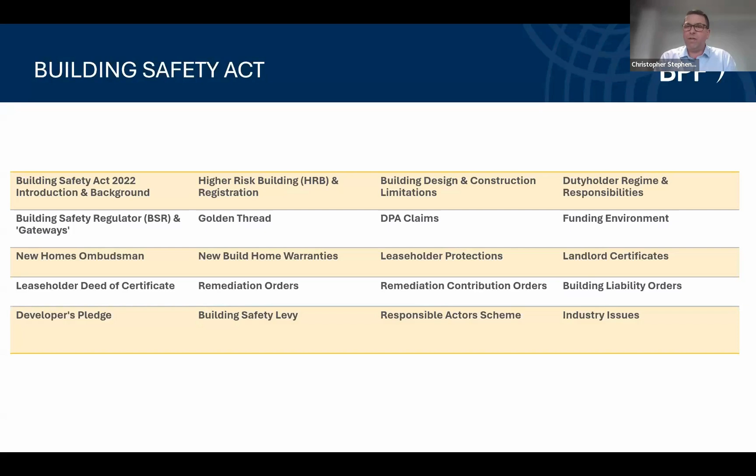Whilst it does all of those important things, there have been some gaps that have been evidenced. You might recall that the Levelling Up and Regeneration Act introduced a change to the way the definition of qualifying leaseholder works, because of the problem that had been evidenced by the surrender and regrant implication of a lease extension, to close the loop and bring that back within the definition. The Leasehold and Freehold Reform Act also does the same.

So the Leasehold and Freehold Reform Act is the second part of a piece of legislative work that the government has been doing, and does important things like banning the sale of leasehold houses, making it cheaper and easier for leaseholders to extend their leases, and increasing the standard length of lease extensions to 990 years. But it was also used as a vehicle to amend the Act.

Implementing regs have been introduced. The provisions of the Act are being phased, so certain provisions are being brought in at different times. For the purposes of the BSA, those were sections 114, 115, 116 and 120 of the Leasehold and Freehold Reform Act. When it was released, the government explanation was that further amendments have been brought in to ensure that the leaseholder protections set out in the BSA are properly secured.

So we're just going to have a look at the 3 key changes that are produced by the Act, which are focused around Part 5, which is the part of the Act that deals with obligations in respect of what we call relevant buildings, so anything over 11 metres. The aim was to ensure that leaseholders continue to be protected from dangerous buildings and from the cost of fixing them.

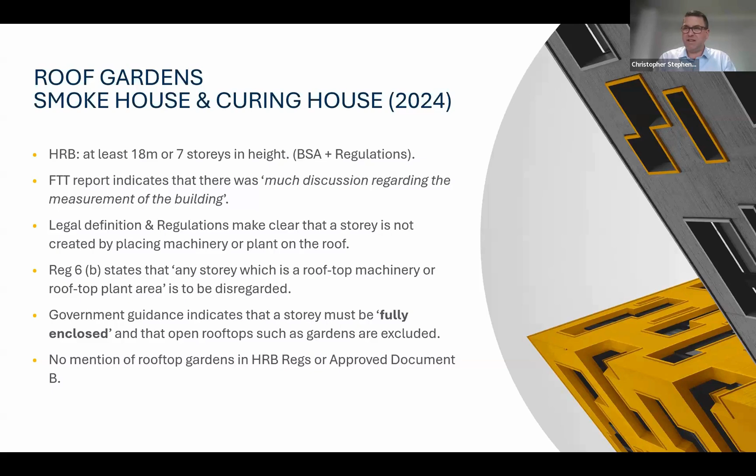The outcome was that there's no clear definition of a story, either in the Act or the regs. And the FTT made the point in the decision that the published online guidance on the landing pages at gov.uk was not a reliable method of interpretation of law.

I think this just brings you back to there's a lot of chat and chatter about this topic, which is vast. The Act is huge, it's got 5 parts, it runs to 300 pages. It's got explanatory guidance notes that run to 465, and 27 pieces of implementing legislation that sit underneath it.

To be able to properly understand it, lawyers like us who have had involvement over the past 7 years need to be asked questions about what this means for clients and their stock. We're still talking about existing stock, so new builds and developments is a different regime.

But it's interesting because the remediation order passed, as I think it would have done anyway, but there was a lot of discussion in the hearing and in the decision about how you do the calculation, what the height of the building is, and how you get there.

The difficulty is if you've got a project already underway or already constructed, you're retrospectively being told that you now have to comply when you might not have considered that you did when you originally put the project into traction. So it's that additional uncertainty, and it requires almost like a unilateral review of what you've got on site for existing projects, which is going to further impact things like viability, presumably.

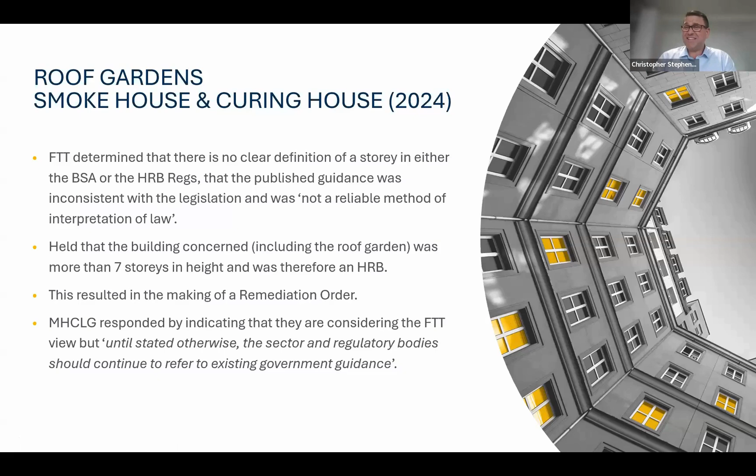Very troubling, particularly because it's kind of an amenity that we see quite common, particularly in London now. Yes, and something that would be desirable and good for the residents. Yeah, and open, post COVID, I suspect there was a big driver for bringing in open spaces, giving people access for mental well-being. It's part of the kind of process.

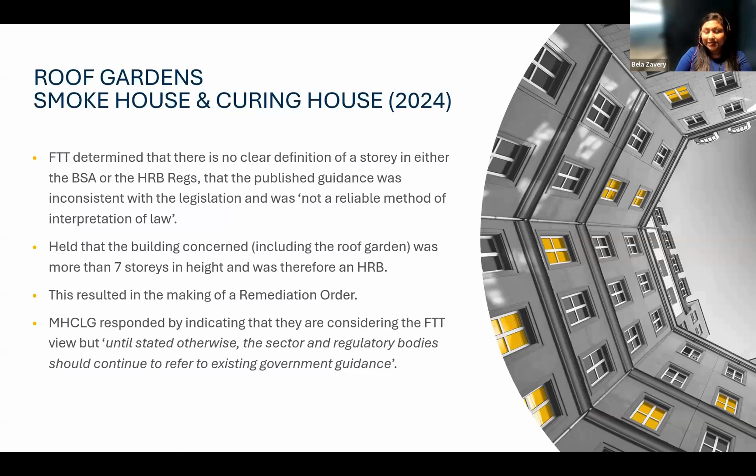That's troubling. I've got 3 cases to talk through. Smokehouse we've done, that's number 1. Number 2 is a case called Lehner v Lant Street, again from 2024.

This is a case that deals with the difference between the leaseholder protections as they are introduced into the back of the Act. Schedule 8 is the part of the Act that introduces the leaseholder protections, and the definition of what the Act terms cladding remediation. So just a few brief facts.

Mr. Lehner was the leasehold owner, or is, I think still is, the leasehold owner of flat 44 in block 1 of 3 blocks at Lant Street that were built in the early 2000s. In 2020, the building's management company got in touch with the residents to say they felt there were some works that needed to be done, involving the removal of external cladding, stripping out insulation, installation of fire safety barriers, and then reinstatement of the original panels. It was a cladding removal and replacement job.

Mr. Lehner decided that he didn't like the idea much of being charged the cost of those works, and the irony of this case is that the per leaseholder cost, or certainly his cost, was very small. This is a case that went to the FTT because it was challenged.

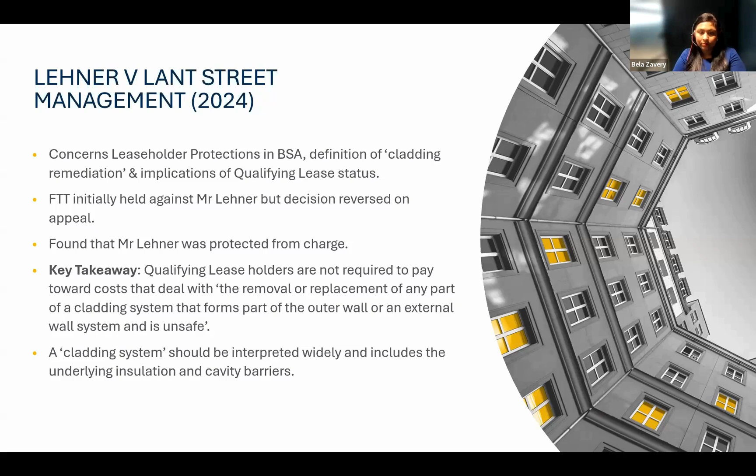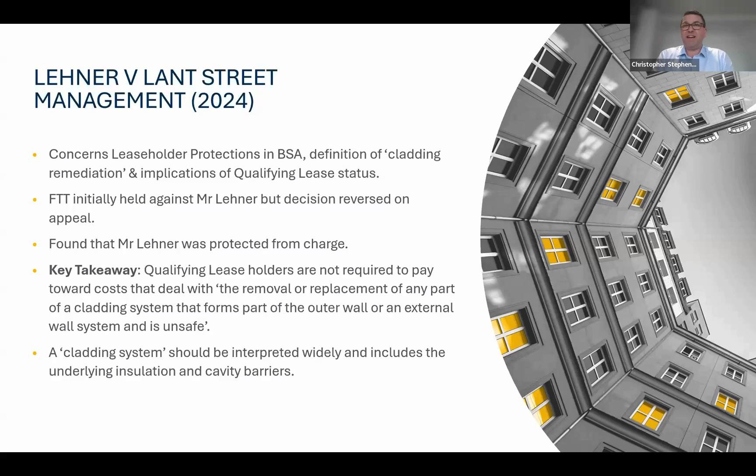The removal, as it's on the slide, the removal or replacement of any part of a cladding system that forms part of the outer wall or an external wall system and is unsafe is what you're looking for. So the point being, cladding system as a term should be interpreted widely and includes a lot of stuff.

And the cost can't be passed on to leaseholders. So effectively, it's a cost that has to be borne by the freeholder, and certain leaseholders are protected. So building owners have to consider carefully works that they are planning for 11-meter plus buildings and think about whether or not they will be able to recover the costs.

I mean, a question, and David, please chime in. I suppose arguably there might be some protections already available if it was a new build that was built not too long ago, say 5-10 years ago, or 5-7 years ago. Is this something that they could potentially look to try to pass on to anybody they've bought from under any collateral warranties or construction provisions, or something they should have hopefully thought about when they purchased? Are you seeing a lot of that?

They're trying to recover it from previous owners, or I think we've got to recognise the fact that we've got the Responsible Actors Scheme. And obviously, therefore, in respect of the new builds, we've got the developer pledge as well, haven't we? Exactly, the developer pledges have got to take into consideration there.

Are you actually seeing many claims under that though, David? Are we actually seeing that actually translate to people? A lot. But what we're also seeing is a difficulty in the fact that you will then start to get two chartered fire engineers who have perhaps been paid by two different parties who have come up with different answers. And then you're going to look at what does a defect actually mean.

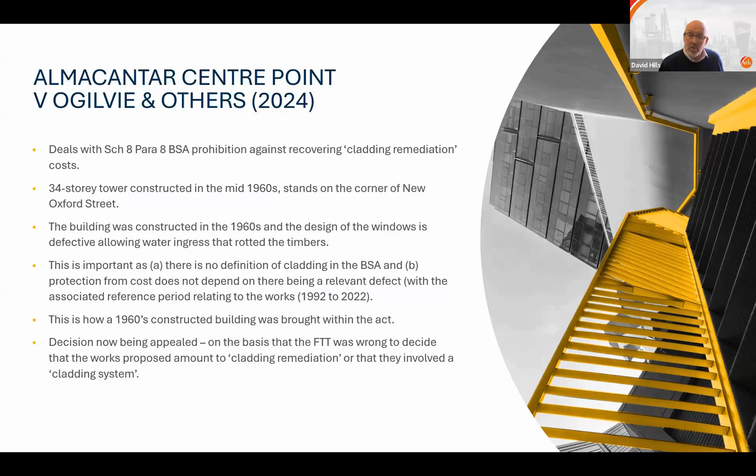Even if some things are required, you've got to consider and take advice on that at an early stage, because there could be a cost implication you can't recover under what we'd call a service charge. There's certain guidance out there, for example PAS 9980, that allows you to look at buildings, and even that document suggests buildings pre-1970 of masonry construction are unlikely to have inappropriate cladding systems. But if work has been undertaken, if any building has been overclad, we need to understand that at a pretty early stage.

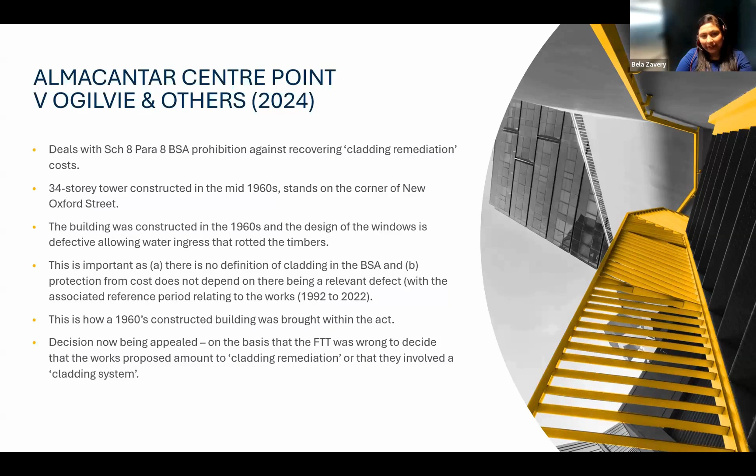Understood, thank you. Chris, back to you. Well, I think that was me done with case law, so I think we've got the next one - maybe have a bit of a chat about the outlook for the sector. What's coming up? So we've got a brief slide here on what happened in '24, a retrospective.

We've got a number of remediation orders that have been made, and a number of remediation contribution orders, setting the principles that these new tools are being picked up and used. When the Act was first introduced, bearing in mind an interested person within the Act can be a public body, I felt they were new and novel and complicated enough that it was probably only public bodies that would pick them up.

But there have been a few privately initiated orders within the mix as well, so expect to see more of that. If we've already got this number so far, I'm guessing it's only going to increase from here on in. From my experience, I don't know about David's, but the appetite of local authorities to use these tools is quite low.

So they tend to use improvement notices as the route through to enforcement, because it's tried and tested and they know how it works and they've done it before. And the costs involved with these can be quite high.

Yeah, and then just to skip over a few here, just conscious of time. But the first building liability order has been made. It's got a complicated case name, but a BLO is a new creation of the Act that allows you to pierce the corporate veil and attack parties that are linked with a developer. So perhaps if an SPV has been used, a project-specific SPV that's been dissolved or closed down and was responsible for poor building practices, it is now possible to loop around to the parent company that was at that time connected with the SPV to try to make a recovery.

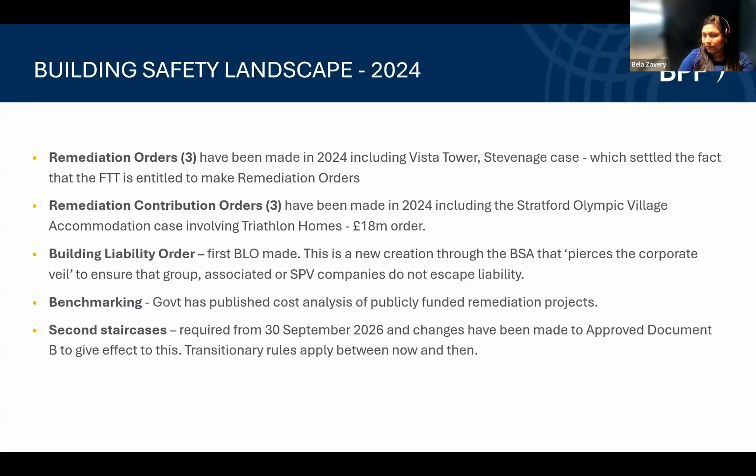So it also impacts things like propco-opco type arrangements, where you've got an operating company and a prop co, risk registers and all the rest of it. It is not the case that if development was undertaken in the 90s and that company no longer exists, that connected parties are free from potential liability.

So that's just something to bear in mind, and the point has now been proven. The government's been very good at releasing benchmarked costs. Those figures have been taken from the publicly funded support schemes, evidence of industry rates for works. That is ultimately helpful for building owners and asset owners, because it should help to stabilize the remedial cost base and allow people to hold contractors better to account. Obviously you've got to find them, and there is a shortfall of labour and construction support in this area generally anyway, but having a published set of data is still helpful.

And then second staircases, the requirement for a second staircase has been set now for 30 September 2026. Many of our clients are designing them in as a matter of course, because they feel it will add to marketability and drive sales. There's been a scheme called Blenheim Square in London, where a developer called Hadley Clario have been criticised in the press about not designing in a second staircase and reducing the height of the building to avoid the requirement. So that's just an example of adverse PR and optical problems created by that.

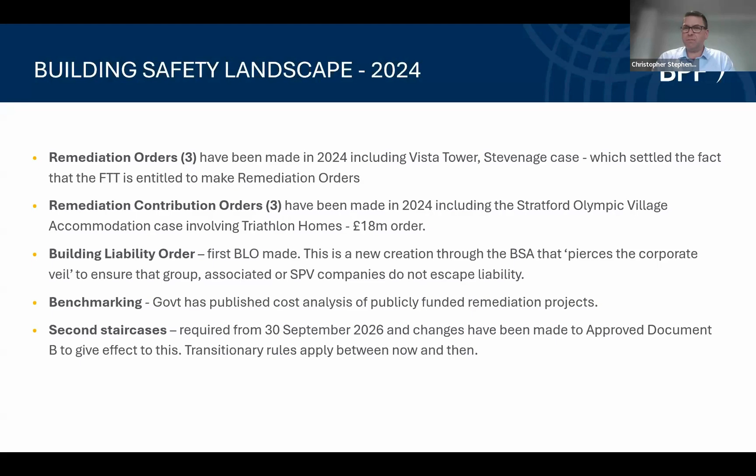And then just looking forwards, a few brief points. A remediation acceleration plan was announced in December 2024. That captures the way that developers are undertaking remedial work. We touched earlier on the developer pledge, which has had 50 some developers sign up to its terms, and 29, I think from memory, have signed up to the acceleration plan, which is a good thing. I think at the last statistics I saw they, as a group, have completed around 25% of the buildings for which they have accepted responsibility. So clearly there's still some work to do.

The government has sought to collaborate with industry and with building owners to try to move timescales forward. And there is a basic deadline set for the end of July 2029 from memory, in which the government would like to see all HRBs finished and all sub 18-metre buildings at least started and underway. And from 2019, when the private sector ACM fund was released, which was the direct response to the Grenfell tragedy, 2029 would then be a decade - it would be 10 years from the commencement of the government support exercise.

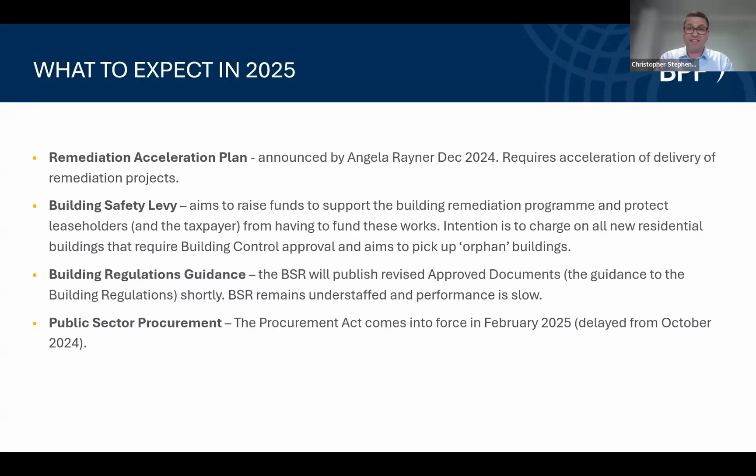That's true. And from my perspective, you have a baseline position that you could use to neutralize any suggestion that more extensive works are required. Which ultimately has huge value. That's very good advice, I think that seems like a good point.

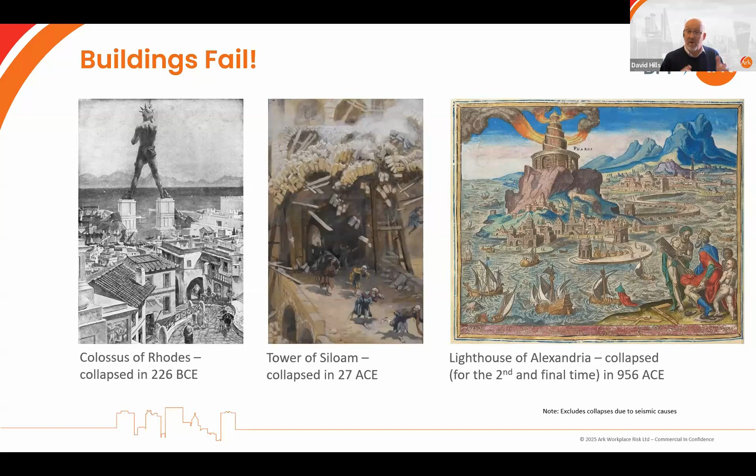We can go back to the Colossus of Rhodes, Tower of Siloam, and the lighthouse at Alexandria. But let's start focusing very much now on residential structural failures.

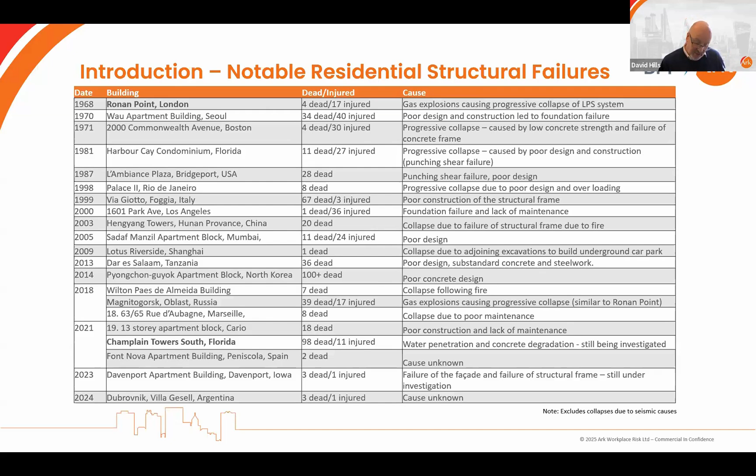What I've done here is highlighted a number of residential blocks that have failed, not due to seismic issues, earthquakes, or other natural disasters such as tsunamis. These are failures due to elements or actions that have occurred within the building, or the actual building's design. I've only gone back to 1968, which is the Ronan Point incident. Taking those alone, we're talking of 500 dead in residential buildings due to significant structural failings. So it's an issue we really need to take account of.

Because when you look at where these incidents have actually occurred, we're not talking about pure third world problems. We are talking about first world problems here. We're talking about countries that have got very good building code bases, yet we are still seeing some significant failures.

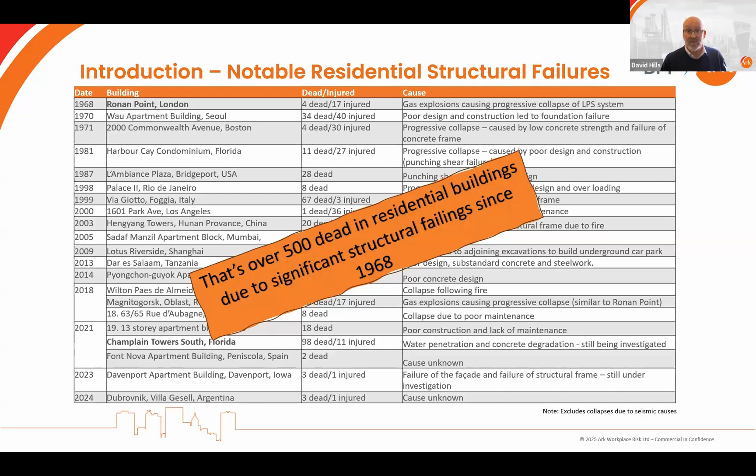So I want to first start off with Ronan Point. Ronan Point back in 1968 was effectively constructed using what's called a large panel system. A large panel system is effectively huge lumps of large concrete panels, but this particular one was designed with what's called pinned connections, and I'm not going to go into too much detail about that.

Effectively, we had a gas explosion on the 18th floor. That gas explosion blew out a load-bearing wall. That load-bearing wall was bearing the load of the floor above. That floor fell down onto the next floor, which couldn't take the load, and that failed too. Effectively, we had what's called progressive collapse.

The defects found included poorly designed joints, for example, that weren't designed to deal with what we call lateral loads, such as a gas explosion from inside the building. In fact, when they looked at it, the joints weren't even designed to be able to effectively deal with the wind loadings that were expected.

We had insufficient connections. All of the forces were focused on a very simple steel connection when actually it should have been spread across the load. And then we had poor quality control. Even the concrete that they had within that was found to have included newspaper and rubbish that had come off the site.

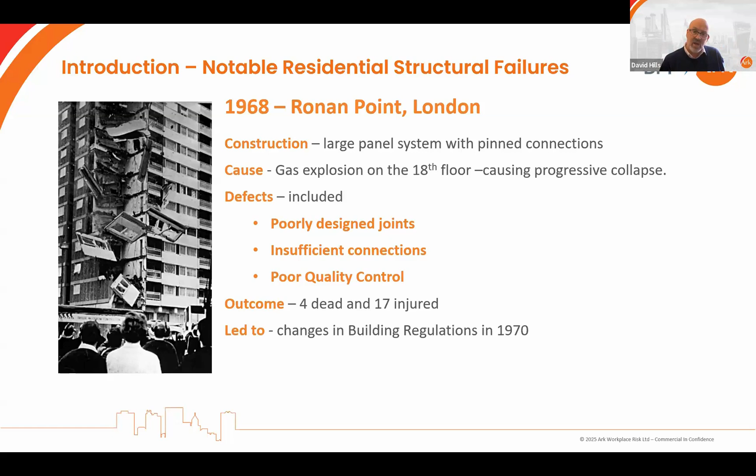Well, I'm going to take you through a video and a simulation of what's called the Champlain Towers South building collapse that occurred back in 2021. This initial section of the video is CCTV footage of the actual building collapsing. I should point out that 98 people died within this building. So if you don't want to see that, there's no bodies or anything else like that.

It's just simple CCTV footage followed by what's called the simulation of why it happened. And the reason why it happened is because it wasn't down to one thing. I'm going to run the video, and what you'll see is that this particular building takes 12 seconds to collapse. The little insert there is the actual simulation of the collapse, and we're going to then see how or why that particular building collapsed in the first place.

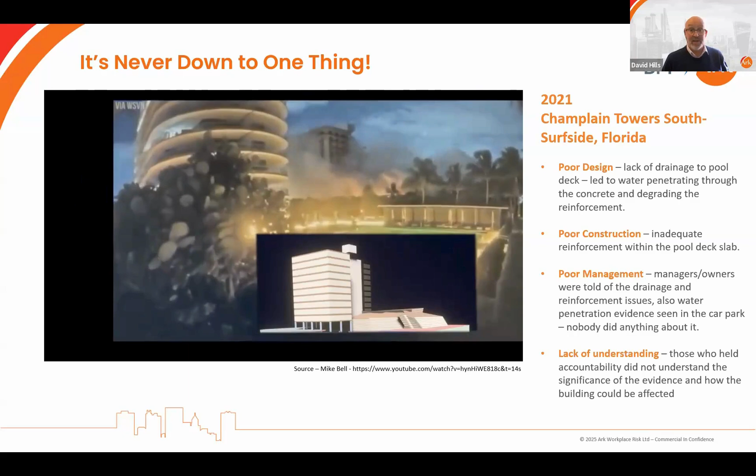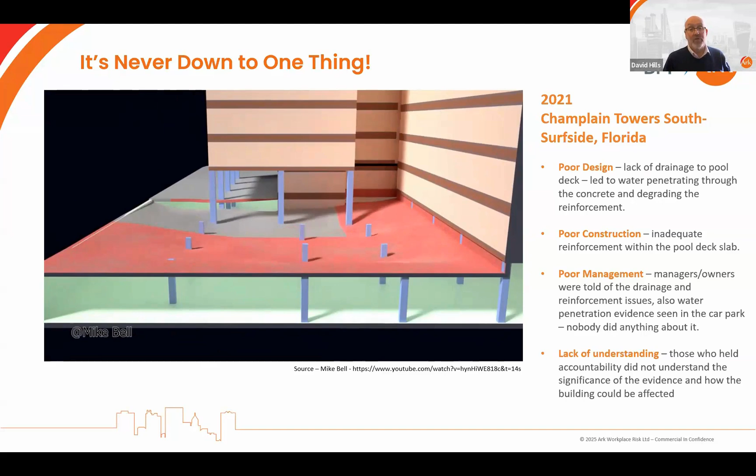This building had a pool deck with parking underneath it, and we had very poor drainage. That poor drainage led to water penetrating the actual concrete. We had poor reinforcement, very poor construction, which led to what's called a punch-through failure of some columns. That happened over a very short period of time, over one evening, which put significant pressure on the main construction of the building, and we had what's called a catenary action, which pulled the other parts out.

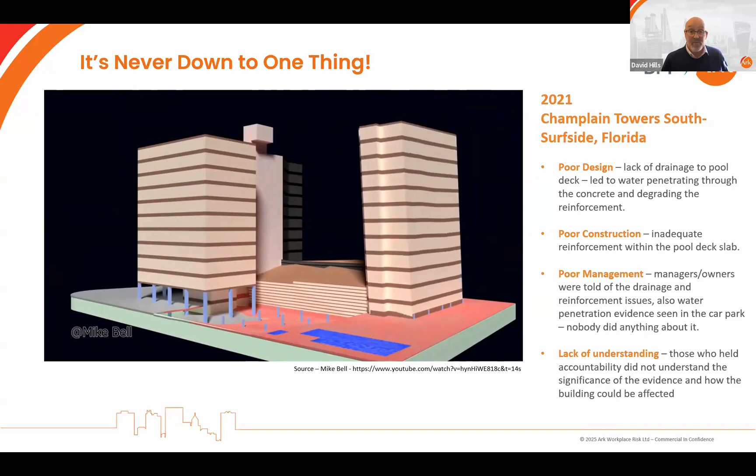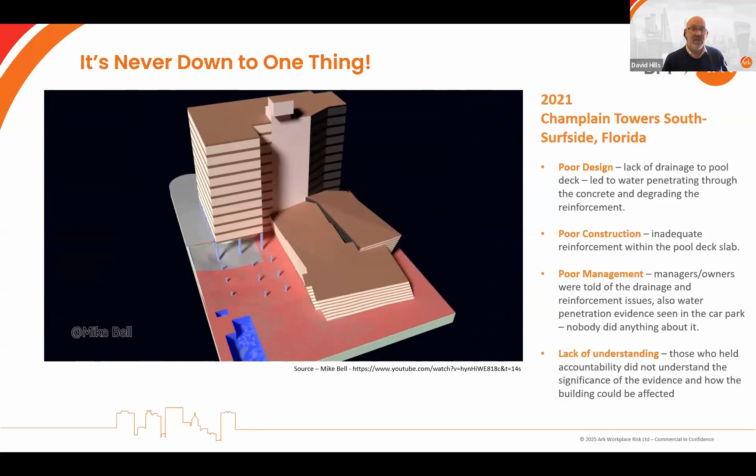Effectively, though, the major issue here is that the management team and owners were told of the drainage problems. They could see the drainage problems. They were told by a survey that they had reinforcement problems. But nobody did anything about it. One of the reasons why they didn't do anything about it is because a lot of people had a very technical, detailed report, but nobody understood it. Nobody knew who was accountable, and the significance of the evidence just wasn't understood.

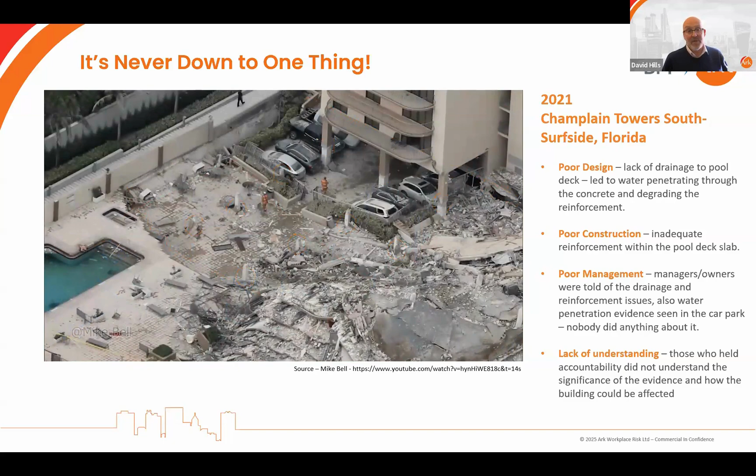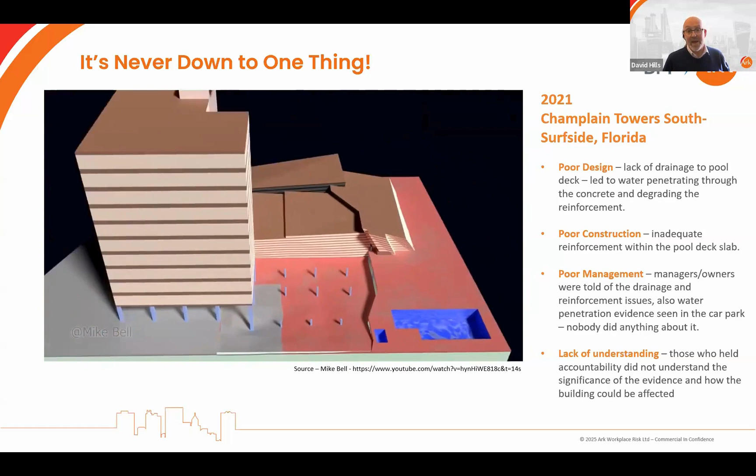So what we saw there was a significant collapse in 2021. We're not talking about 30, 40 years ago, we're talking less than 5 years ago. The federal government are still investigating this and will decide how they are going to take action. But you can see a significant failure in an area which many have told me has a much more onerous and robust building control and building code basis. So that's the quick history lesson.

We understand, therefore, that buildings do fail. And the government have decided to set up what's called a structural safety working group, a series of experts that report directly to the government. In their last report to the government, they actually raised four major concerns.

I'm going to go back to Ronan Point to start off with and talk about the fact that aging large panel systems are still out there, particularly those built in the post-war era. They were designed as a rapid response to housing shortages at the time. And what we saw at Ronan Point could, according to the SSWG, actually occur again.

In a recent Freedom of Information request to the Building Safety Regulator, it's been identified that they know of at least another 200 buildings that are HRBs that have large panel systems, that have gas within them, but haven't had sufficient strengthening works. The failure to properly assess and reinforce these structures could result in catastrophic consequences, both in terms of human safety and financial liability.

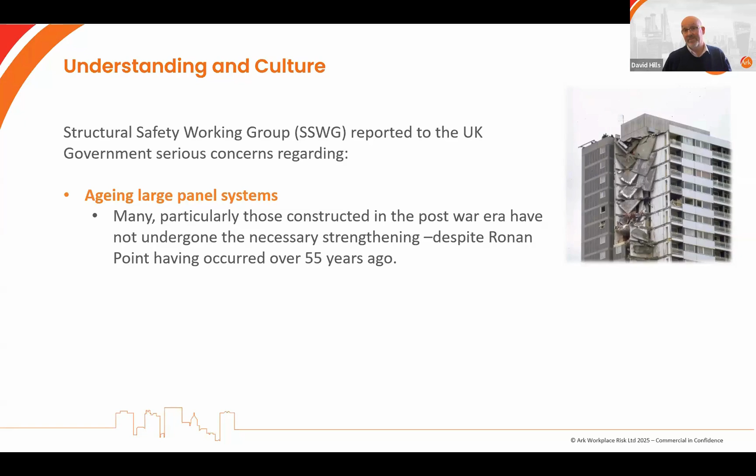Last year, I would imagine most people saw in the news information related to what's called reinforced autoclaved aerated concrete, RAAC, or as one of my structural engineers called it, a bar of aero. Effectively, what we've found is that it's a lightweight concrete alternative that was used from the 1950s right the way through to the 1990s. Investigations are actually proving that it's just no longer suitable and sufficient. RAAC panels deteriorate unexpectedly, and it can lead to potentially very, very quick structural failure.

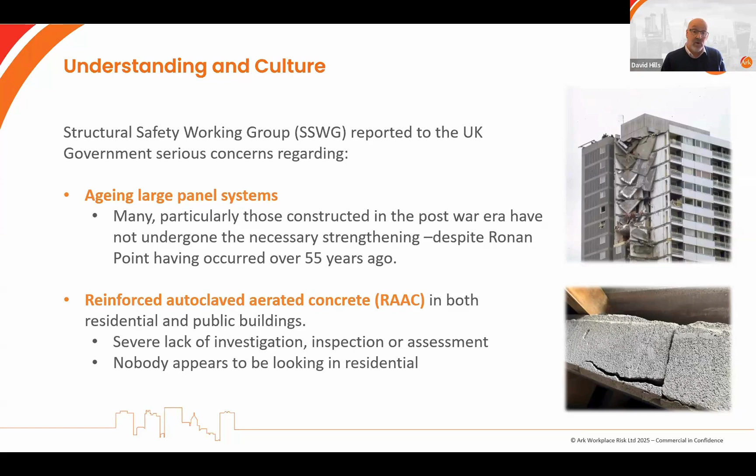I totally agree, that's exactly what people need to be looking at. We need to actually understand what we have, and the Structural Safety Working Group are concerned that we just don't have that understanding. They talked about two other particular growing trends and problems.

Now, the growing trend of adding additional floors to existing buildings, we also refer to as airspace developments. When you add floors to an existing building, it offers some significant commercial potential. We all know that, but the working group is extremely concerned that there just has not been significant understanding or consideration of whether the existing building can actually take that particular loading. There is also an element, I know this from personal experience, of a lack of accountability. Who do you speak to if something goes wrong?

And if you're a leaseholder or a tenant living in one of these buildings, there is not enough protection in place to make sure that all of this can happen. Who do you speak to? The local authority can't take action because it frequently falls within permitted development rights, so they don't have the ability to do anything unless it breaches a construction management plan. It's very limited recourse.

Although, if we are doing that to a building that is 6 stories and we're adding a 7th story, therefore bringing it within the auspices of the Act, remember that definition can change. It is probably likely that it's going to change over the next couple of years, from what the regulator's talking about, that undertaking that type of work is going to come under scrutiny from the regulator, and the regulator is going to expect to see comprehensive structural assessments of the existing building.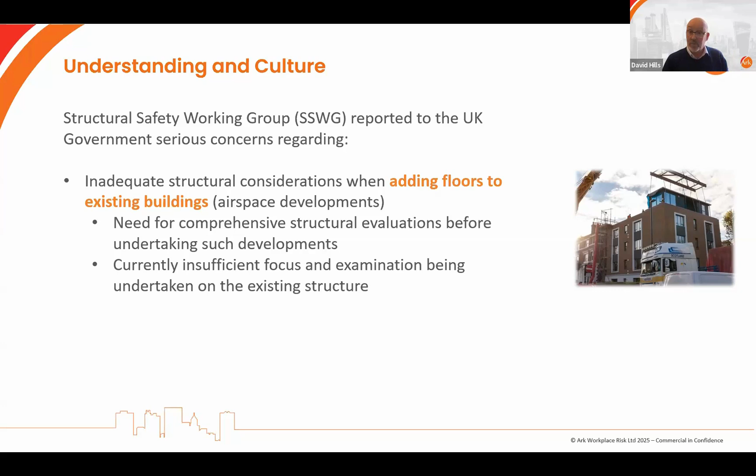I just want to continue through the cladding issues as well. We mentioned earlier the brick slip side of it. The issue of cladding failure, particularly with brick slip and other types of panel systems, is not new, but it remains a persistent problem. We are often seeing panels detaching, not whole panels but part of panels detaching from buildings and leading to some serious accidents, posing a continuous threat to public safety. It comes down to lots of different reasons: poor construction technique and poor certification problems, which we can see across the whole industry. We've got a major issue in respect of construction products and their approval.

Most people will turn around and say the issue relating to cladding is fire related because of what happened at Grenfell - that's heightened awareness of cladding materials. Almost all the focus many people have had is on fire safety issues, understandably. But the need for structural and stringent reviews of cladding materials does also remain urgent. The financial impact of rectifying unsafe cladding can be devastating, as many property owners have already experienced firsthand. One question I would have later for Christopher is that the Act really focused on remediation of external walls relating to fire safety, but we also ought to be thinking about the remediation of external walls in respect to structural safety as well.

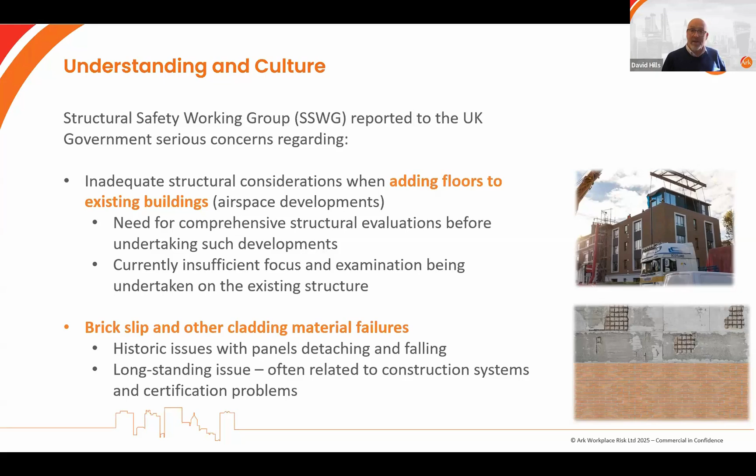Just finishing off what the SSWG have said, they are extremely concerned, and some of the language they used in the report we really need to take heed of. They believe, with the evidence they've seen, that the construction industry has a tendency to still continue to prioritize profit over safety - that was terminology they used directly to the government. They also suggested there was a need for the industry to have a cultural shift towards actually valuing safety. Far too many organizations, they suggested, just did not want to actually understand the building because many of these issues were hidden, and if they're hidden, they're out of sight, out of mind. They made it very clear that too many owners and managers are ignoring structural concerns, probably down to a lack of understanding.

I think it also depends on the way a lot of these buildings work. So if you're a build-to-rent operator, the expectation is that you're going to maintain, and there's an element of stewardship which sits with the building. So taking on a building and renting it out, you have to be vigilant, because otherwise you can't rent the property out on a long-term basis.

If you own the freehold of a building that's really largely retained for the purpose of ground rents, and you wanted to add an extra floor of apartments, the real belief behind it is that you'll extract all the value out of the building when you grant up all your long leaseholds. So all you're really left with is ground rents.

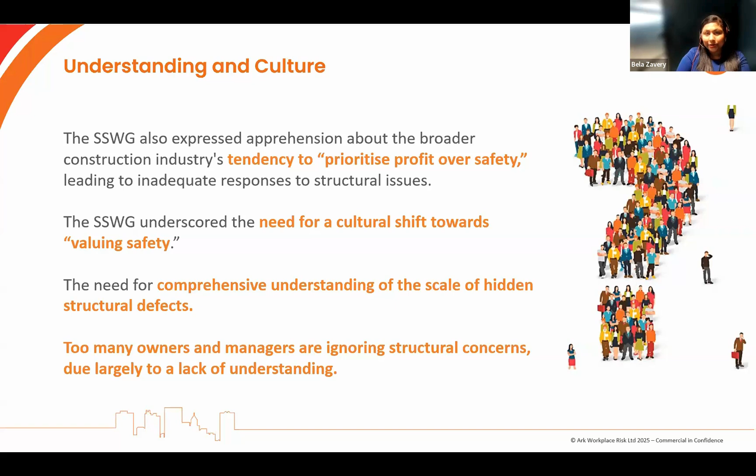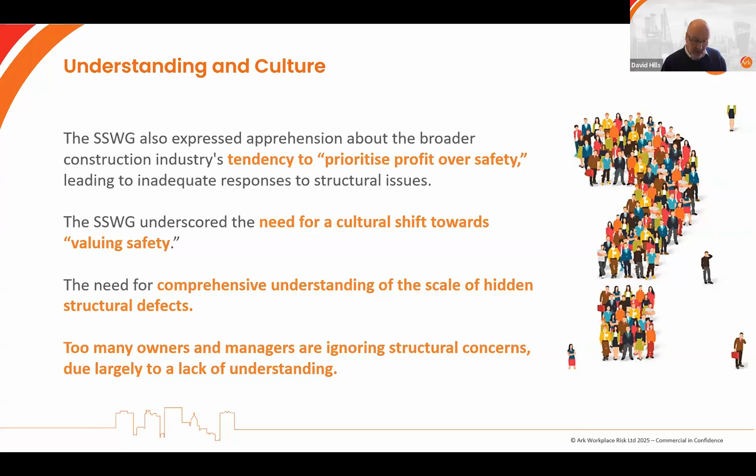Okay, so I'm going to whiz through the next couple of slides because they're really just about where we're sitting now in respect of higher risk buildings. So we all know what a HRB is. Currently it's a building with 2 or more dwellings, 2 or more residential premises, or student accommodation that is 18 meters or 7 stories.

But we have to recognize that scope is going to change. It's a very fluid situation, and the Secretary of State could effectively change both scope and extent at any time. Obviously they'll have to go through statutory instruments, but the Grenfell Tower inquiry has made it very clear we need to move away from this arbitrary 18 meters or 7 stories. It's an arbitrary figure, and the minister at the time, when asked why that was the particular figure, said, well, we had to come up with something. So 18 meters and 7 stories is where we are.

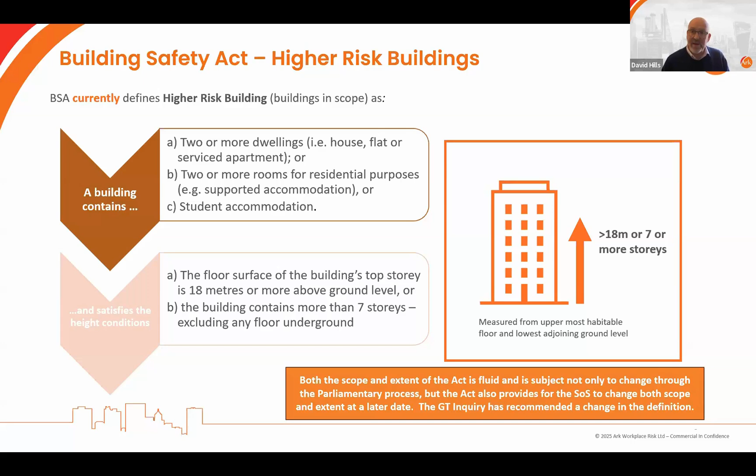Okay, so what does the Act actually require us to do? Well, it basically says we've got to assess building safety risks for the parts for which you are responsible. Now, when we consider what a building safety risk is, it's defined very clearly as a risk to the safety of people in or about buildings, relating specifically to the spread of fire, to structural failure, and any other prescribed matter.

So we get a lot of questions asked - well, is it a legal requirement that I do a structural risk assessment? From what we can see, yes, structural risk assessments are a requirement of the Building Safety Act when you look at Section 83 and Section 62. Section 62 makes it clear structural failure has to be assessed - it's a building safety risk.

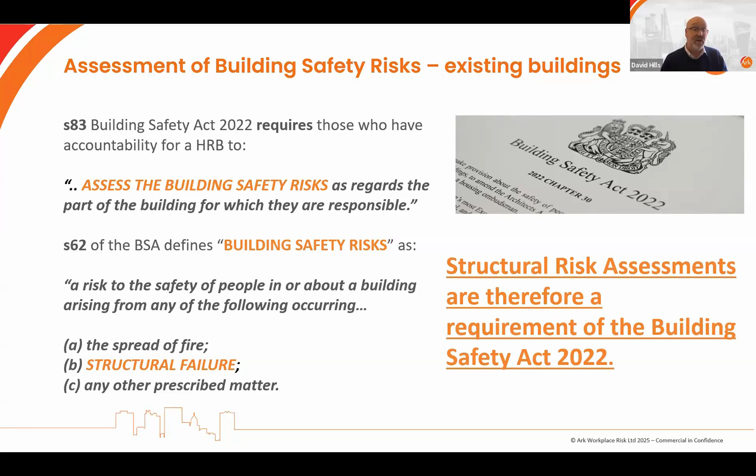What the Act has also said is that if you've undertaken an assessment, those who are accountable for that higher risk building - and we're talking buildings over 18 meters, 7 stories - should be undertaking further assessments at regular intervals. They should be looking at those assessments when or if they suspect the current assessment is no longer valid. For example, if we're undertaking an airspace development, I would suggest that assessment is no longer valid. But also the regulator themselves may direct you to undertake a structural risk assessment within a specified period of time. So that's what the law says.

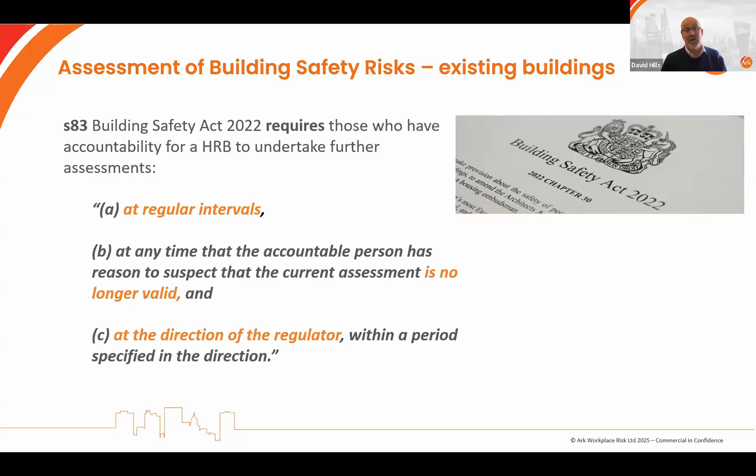Now, what we've also seen is some significant guidance being issued by the regulator and others. The regulator, in December last year, issued their guidance on how you should apply for a building assessment certificate and the criteria they will be reviewing. They made it very clear - criteria S19 makes it clear - a safety case report should include evidence to confirm that a suitable and sufficient assessment of the risk of structural failure for the building has been undertaken.

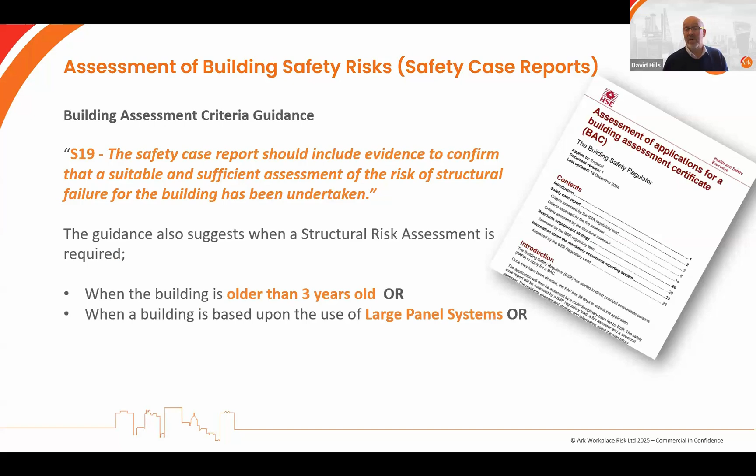The guidance then gives us a bit more information and suggests that a structural risk assessment should be undertaken if the building is over 3 years old, or if the building was built using a large panel system - and buildings are still using large panel systems - or where the full design and construction details are just not available. And earlier, Bella, you mentioned the fact that some information is often difficult to get.

I can assure you, it is incredibly difficult to get hold of. A lot of people just don't have access to that information. But the guidance also suggests this applies where there is a lack of understanding of the structural design, and finally, if there is a known history of structural problems.

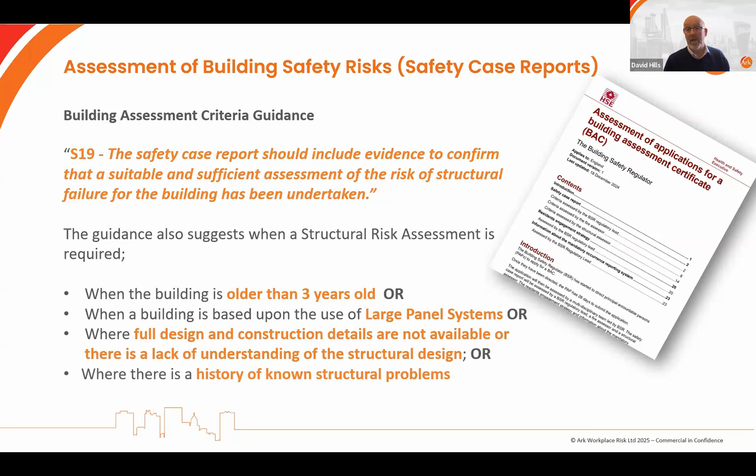So again, we've got the law that tells us we need to be undertaking these assessments. We've got guidance that tells us very clearly what the regulator is going to be expecting to review. And then just a couple of weeks ago, at a Construction Industry Council webinar, the building safety regulator themselves provided some insight about what we call emerging themes.

Now, they've had over 1,400 applications for building assessment certificates for existing buildings so far. That's a lot, and they haven't produced a large number of certificates so far. They are extremely concerned about the amount of additional information they are having to ask for. Basically, the regulator has said they clearly recognize that applicants are more familiar with fire, less familiar with structural issues, and therefore we need to be able to address that.

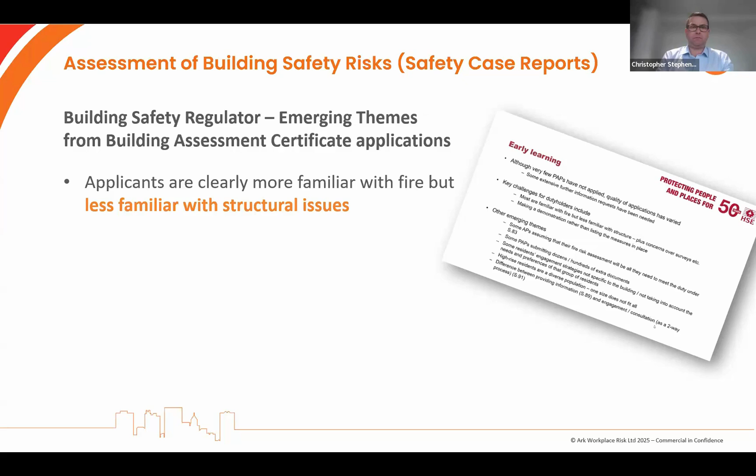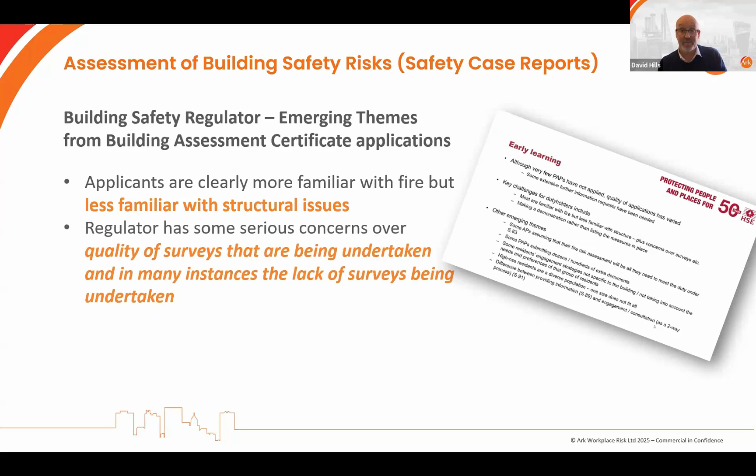We need to start thinking about when we're submitting our application that we've considered structure to the right degree. They are also extremely concerned about the quality of surveys when people have actually undertaken them, and there is a lack of any understanding of structural risk or even structural condition. The regulator also pointed out that many accountable persons assume that their fire risk assessment is all that they need to do to meet their obligations.

But they've made it very clear that's not the case. So is it good practice that they should be looking at doing a structural survey before they commence works, but then revisiting that after the work's completed to make sure that's still the case, and then on a regular basis as well? Totally, that's what we should be looking at. Structural risk assessments should now be in the same psyche that we have in respect to fire risk assessments.

You may not be undertaking them every year, there may be a greater frequency, but we've got to start thinking that structural risk assessments or condition surveys are a necessity. Easy for me to say.

But that's also part of the due diligence process when you're acting on acquisitions, Chris. I think it's potentially something else that we as lawyers should be asking for, and as investors, if you're looking at buying a building, that's something you've got to see—not only that one survey has been done, but that it's been done consistently, almost as something they've taken on board as part of their building maintenance, considered at frequent intervals.

Or you might want to consider commissioning your own survey to complete the process and make sure there's an up-to-date version. Because you often see a lot of these building surveys being undertaken before works are done, but actually once you're on site, things are happening constantly, so it probably needs updating after the works are completed.

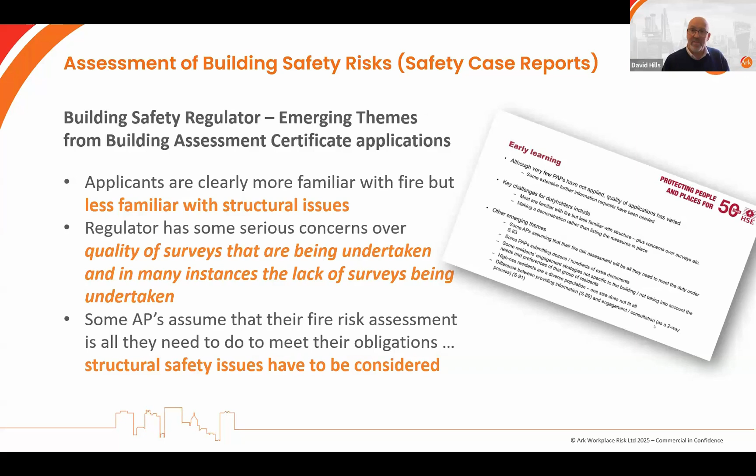In her speech, she actually suggested that we should be starting to name and shame those who continue to try and game the system.

She was extremely critical of the applications being submitted to the regulator and suggested that was a significant cause of some of the delays. She highlighted one particular case, quite a shocking one, where someone submitting their justification to the regulator wrote a one-page document with these words on it: "I don't know why I have to do this. It complies."

So even with the warnings, even with the guidance, even with the clear requirements set out within the Act and the regulations, we're still seeing issues with both development and existing stock. My question to the industry is, why are we not getting this? Why are we not getting this, especially when the benefits can be great?

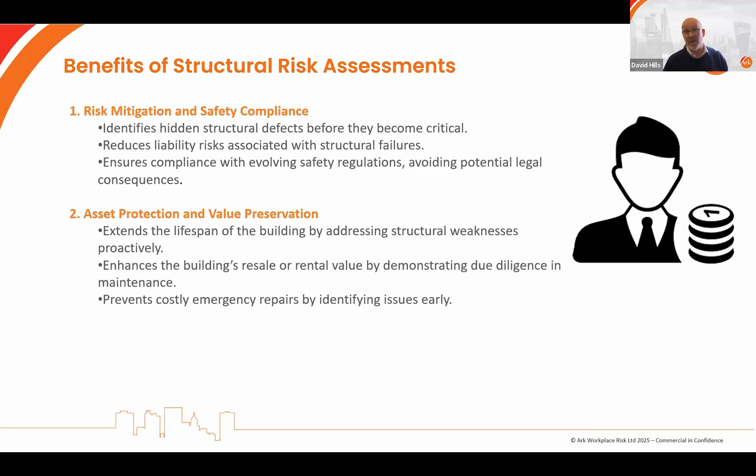It can also support prevention of costly emergency repairs by identifying potential risks or issues early. In addition, it can reduce long-term repair and insurance costs by mitigating risks in advance. Structural risk assessments can play a really vital role in long-term property management and maintenance planning, making sure we focus on what's important and effective rather than what is not. So it can prevent sudden financial losses due to unexpected structural failures.

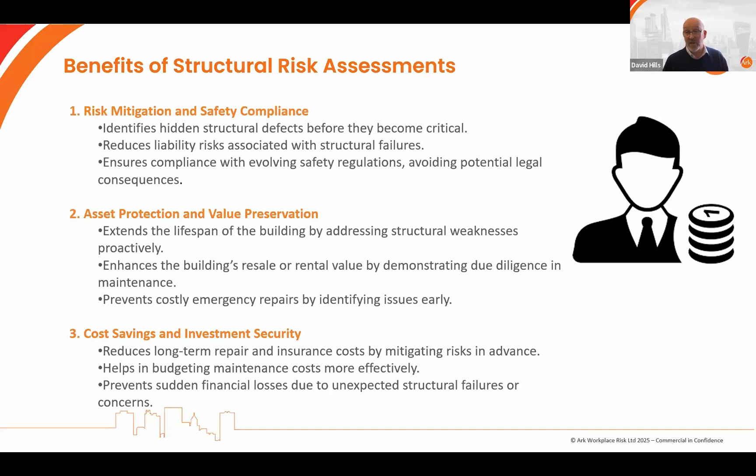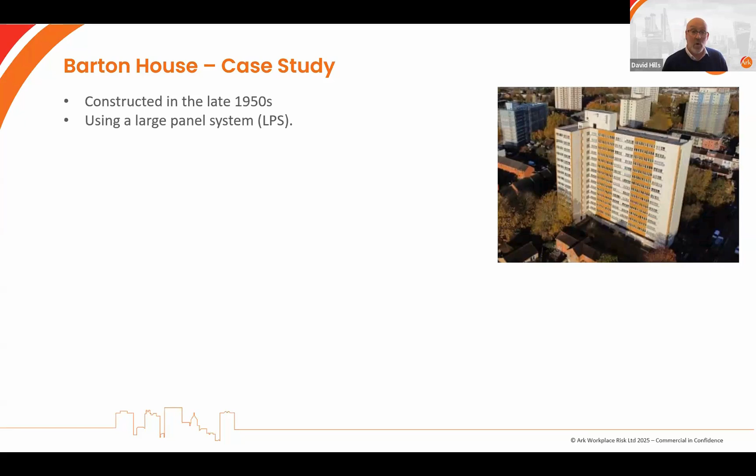With that in mind, I really want to consider what happened at Barton House. Barton House is a 65-year-old, 15-story tower block based in Bristol. It was built in the late 1950s using reinforced concrete walls, basically a large panel system.

In November 2023, an engineer's report, undertaken as part of the owner's safety case process—so they were going through the right process—concluded there was significant risk due to disproportionate collapse. There was a lack of structural ties between the floors, and in addition, the quality of the concrete was inadequate. Basically, they had to undertake works within the building.

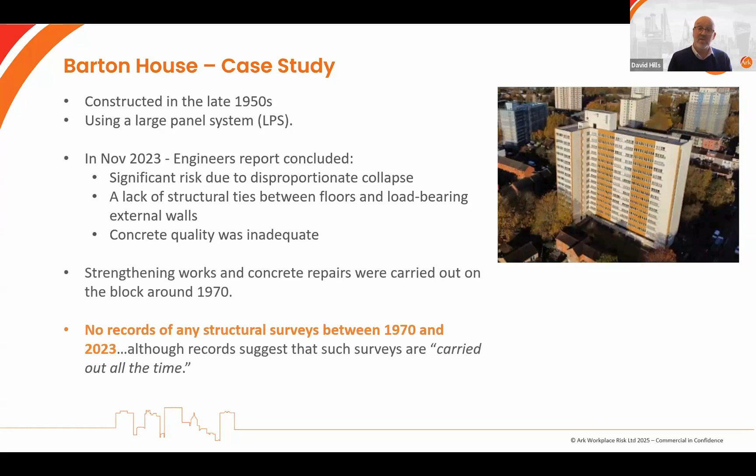Going back through the history of it, there were strengthening works and concrete repairs carried out on the block around 1970. But there were no records of any structural survey between 1970 and 2023, although there were some notes saying, yeah, we undertake these all the time.

So the costs associated with that: we had 250 residents that had to be rehoused in local hotels, at the cost of the owners, between November '23 to February '24. The cost of the works within the building was estimated to be in the millions. And we've got residents themselves, many of whom have said, we just don't want to be here anymore, but we can't sell. They also don't trust the owner, and they don't trust the building itself.

Yeah, so the costs can be significant. Who would want to now live in Barton House, knowing that it's been in the press, knowing that we've had structural issues within that particular building?

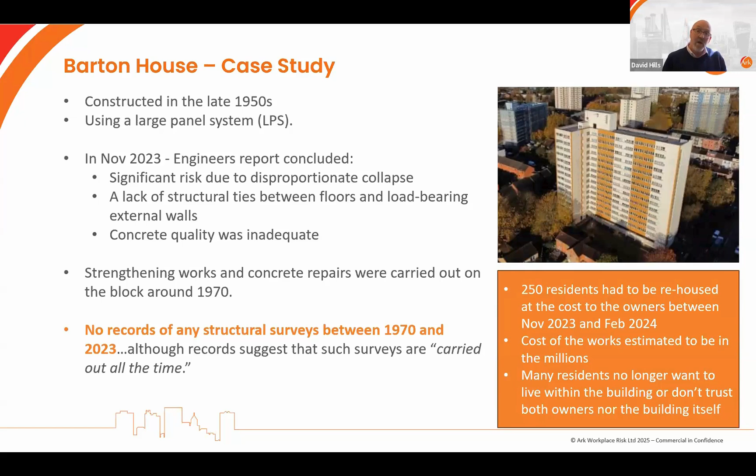So that's a health warning for anybody who's basically buying a building which has gone through these issues, and anybody who's looking at retrofitting a building with a view to enhancing the development - it's a concern they're going to have going forward.

I just want to go through the last few other benefits of structural risk assessments. Obviously, they can support and enhance marketability. Under the Act, those who hold accountability are bound to share information between each other and within the residents themselves. So if residents can see you're taking your responsibilities seriously and undertaking those regular assessments and surveys, that could also attract higher quality tenants and buyers who may prioritize safety and reliability.

When my son purchased his property, the first thing I was asking for of the owner was not only the FRAEW, the fire risk assessment, but the structural risk assessment. We decided that particular building would not be particularly good for him because I couldn't get anything out of the owner, so we moved on to something else.

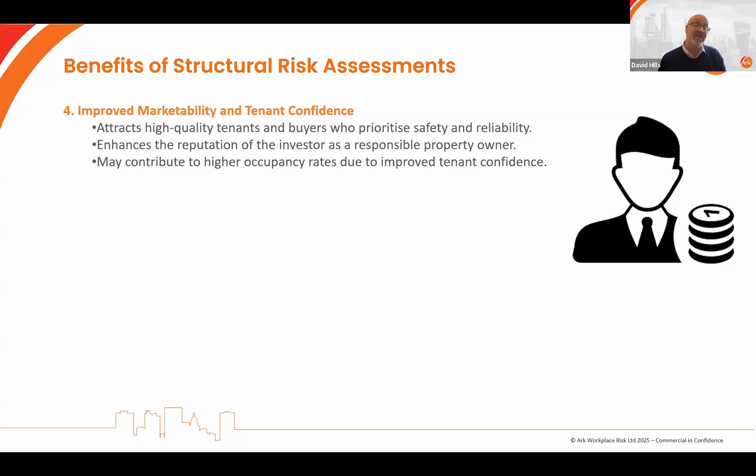So it can contribute to higher occupancy rates and improve tenants' confidence within the building. And remember, they are going to see this information - or if there's a lack of it, they're going to see that as well.

I think it's also important that we recognize it facilitates future development. In the ever-evolving real estate market, opportunities for expansion and innovation are constantly with us. So we need to understand the integrity of our buildings, not just the fire basic elements - we need to understand the structural integrity, especially if we're upgrading it, especially for airspace developments. We also need to make sure we consider modifications or extensions.

And when I'm talking about modifications, I'm not talking about significant things. A structural risk assessment we did about 6 months ago for a particular client found that in a concrete beam in a basement within a higher risk building, an engineer who was asked to lay some new cabling had drilled a 3-inch core hole through a load-bearing beam, drilling through at the wrong place - the place you would not want it to be - drilling through reinforcement.

So it isn't just about major developments - simple maintenance elements need to be considered. And the biggest problem is that managers just don't understand that that would or could have a major impact.

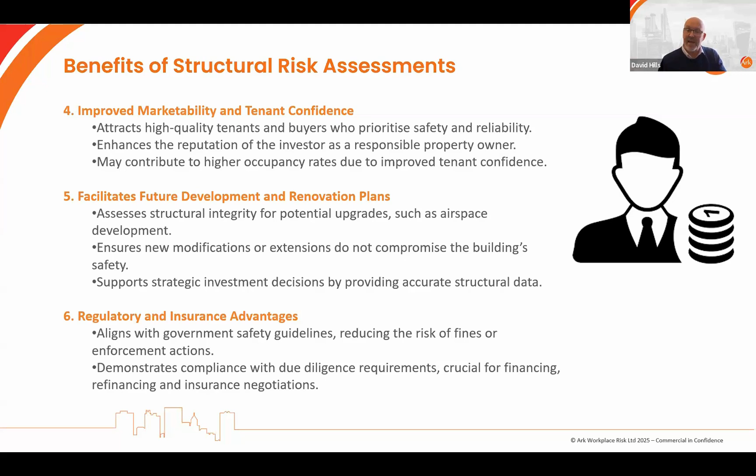I'm conscious of time, so I'm just going to quickly run through the next ones because I'm going to start to get a little bit techie. And I hopefully haven't been so techie than I normally would. No, it's been really informative.

Yeah, absolutely. The Health and Safety Executive, and therefore the regulator, has said that these assessments have got to be proportional to the risk. The regulator has defined that proportionality element based around the idea that measures taken to control a risk should be in proportion to the risk itself. So it's based on the idea that resources should be focused on the greatest risks, not on low risk areas. Effectively, it's a balancing act.

And so they have set out their own views on how you can determine proportionality: severity, likelihood, scale and nature of the building and the hazards, the density and types of people within the building, the number of buildings, and the number of people within that particular building.

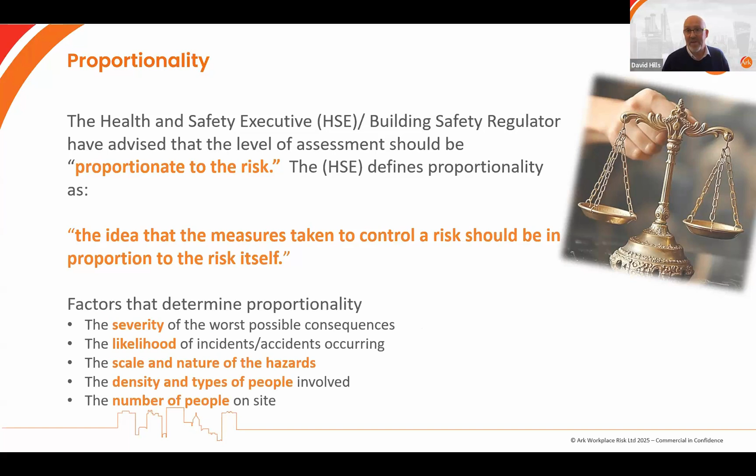I think the best way of looking at proportionality is to look at 5 key areas. If we look at different types of buildings built over the centuries, age plays a really important part. Older buildings were subject to codes which had lower factors of safety, and the design of those buildings was also subject to different building codes at the time, which don't necessarily adapt quickly enough or sufficiently to the evolving modern methods of construction.

We also have to look at the construction techniques as well. Different construction techniques have very clearly known defects and issues. We know the issues relating to large panel systems, we know the issues relating to steel structures, to concrete structures - which brings me on to material usage.

We all know, if you read the Grenfell Tower Inquiry report, that material testing is not where it needs to be. In fact, the report says it's questionable. So we need to start thinking about the materials we're using. We know what type of defects we're likely to get with various types of material, and we need to consider those in respect of our proportionality review.

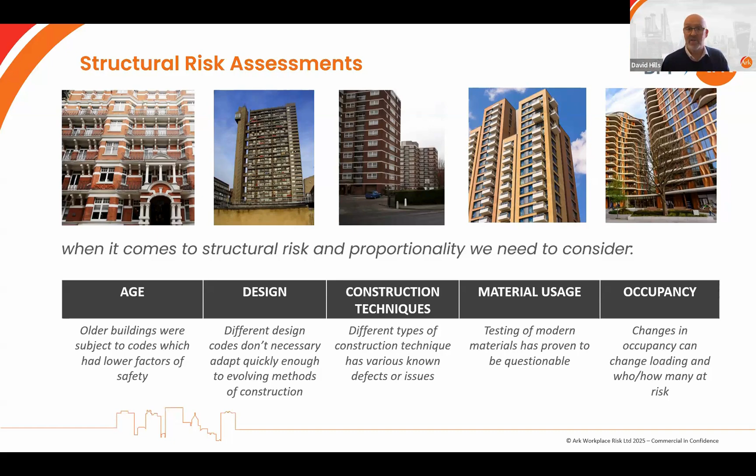And the way that the Institution of Structural Engineers have provided their own guidance on this is based around a very simple 4-stage approach. We should be collating building information. We should be identifying potential weaknesses based on those 5 particular areas. We should then be assessing those building weaknesses by actually looking at the building. Now, that doesn't necessarily mean we have to undertake full intrusive investigations, but it may be that we have to look at targeted investigations at very clear issues or areas we're concerned about.

And we also have to consider how the building has been modified. And lastly, it's all about recording that, which comes down to guidance issued by the Institution of Structural Engineers. There's a fantastic website called CROSS-UK, which tells the whole world about the types of issues and defects we've got within our housing stock and other types of buildings as well. And obviously we've got guidance issued by the BSR. But effectively it isn't a once-only process - it's a process that needs to be considered over time.

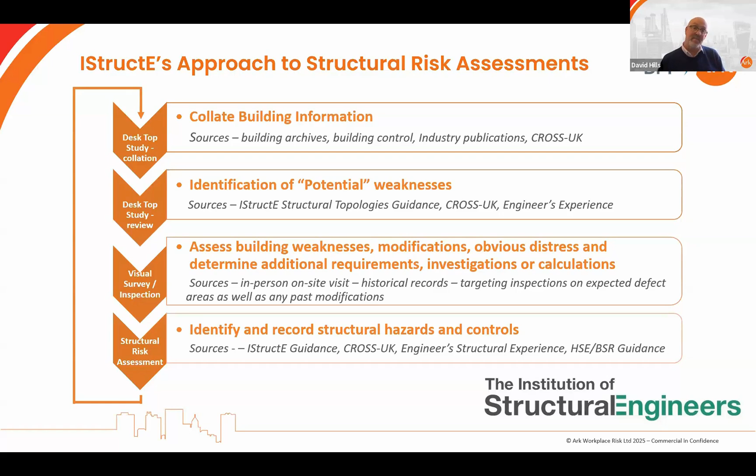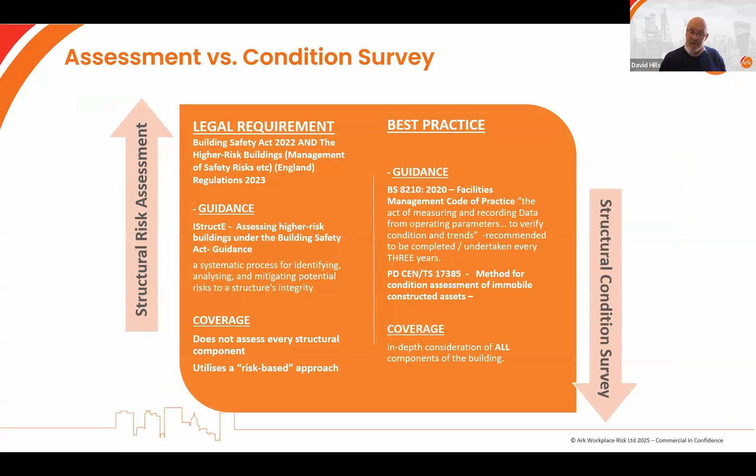The last thing I just wanted to quickly go through is the difference between assessments and condition surveys. Condition surveys are, or should be, part of your planned preventative maintenance program, but they are guidance. Whereas a structural risk assessment, which does a different job, is a legal requirement. The easiest way to put it is that a structural risk assessment is a forward-looking process aimed at identifying and considering potential hazards and risks within your building. It basically evaluates the likelihood and consequences of any structural failure, and that will help guide your decision-making process for risk mitigation.

A condition survey is something completely different. It's a diagnostic survey looking at the current physical state of the structure, and it's far more detailed, focusing on detecting defects and known deterioration. If they're undertaken every 3 years, as the Code of Practice recommends, you're going to have that baseline and an understanding of where deterioration is occurring, and therefore adjust your maintenance programs accordingly.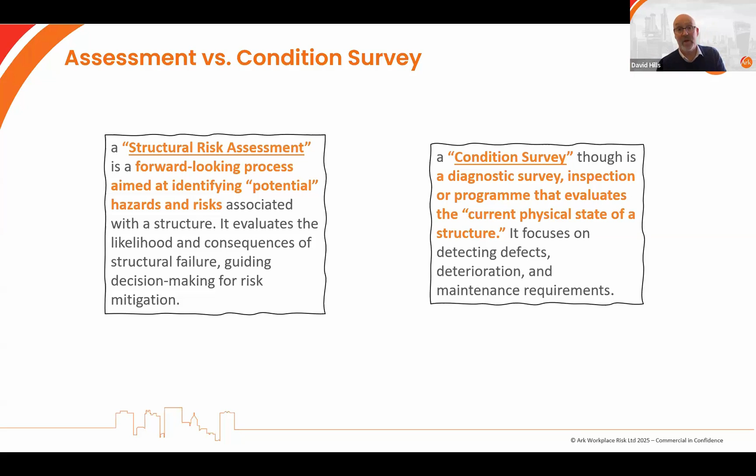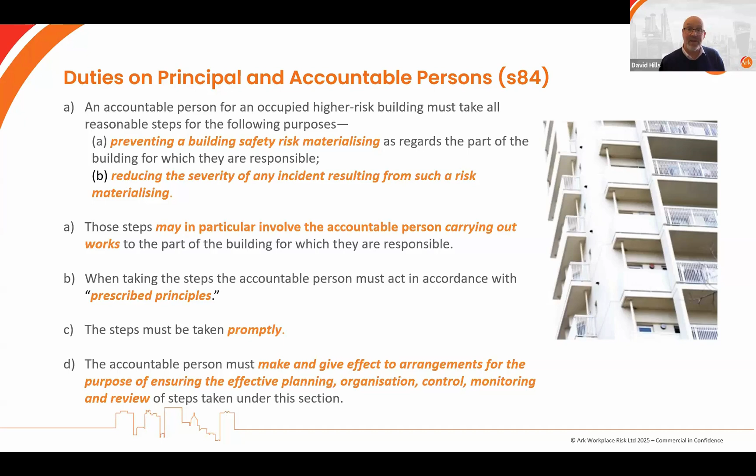So the last couple of slides, I just want to talk about the duties on the principal and accountable persons, specifically to manage risk. I've shown the whole of section 84 there, but it's the E section - the fact that the accountable person has got to make and give effect for the purpose of ensuring effective planning, organization, control, monitoring, and review of the steps you're taking. When you look at the guidance issued by the regulator, that's based around delivering a building safety management system, which based upon the guidance should include this.

So it's very clear that we cannot just assess buildings and take that assessment and put it on the shelf and let it gather dust. We've got to manage those structural issues that are raised. And that management approach, especially in high-risk buildings, is something the regulator is going to pay very particular attention to.

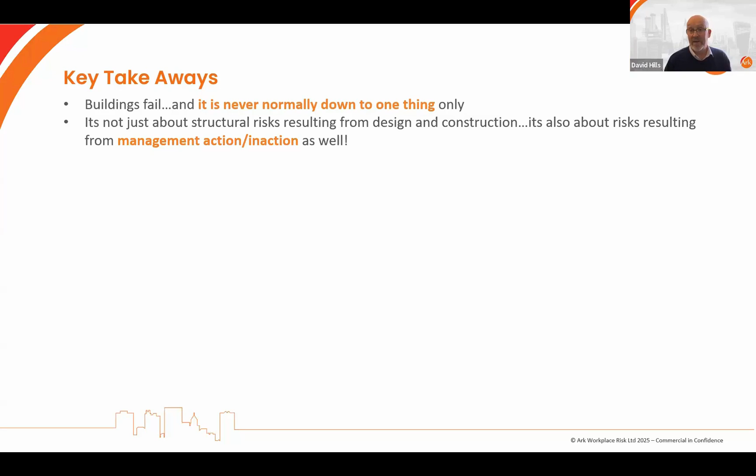So finally, what would I suggest? I think we need to recognize that buildings fail, and I wouldn't suggest it's down to one thing only. It's not just about structural risks from design and construction - it's also about how we manage the building, the actions we take, or even the inactions we take. I think we've also got to recognize that the working group has highlighted there's a need for a cultural shift towards valuing safety and a comprehensive understanding of the scale of hidden defects.

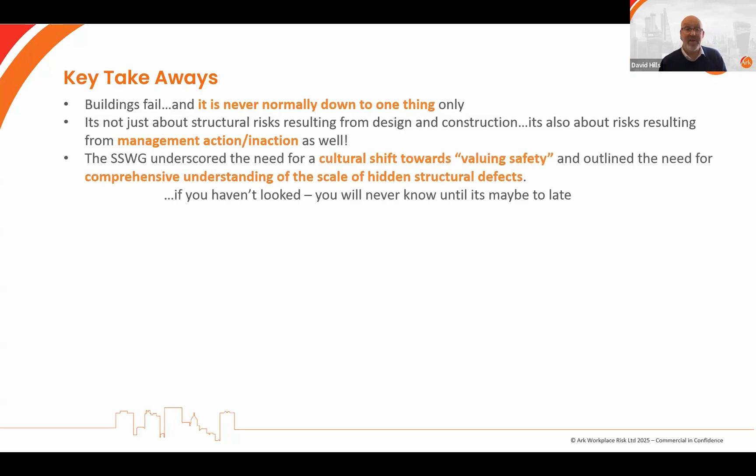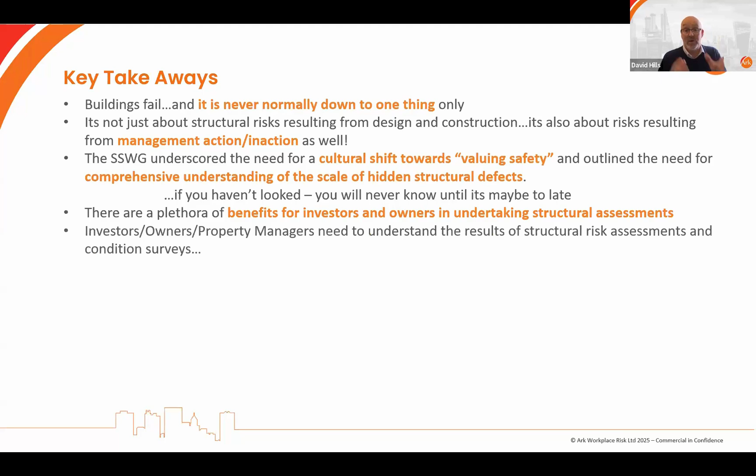Bella asked me right at the very beginning of this whole process when we met about what should we be doing. And I said, very simple: we need to look. We need to look now before it is too late. There is a plethora of benefits for investors and owners in undertaking structural risk assessments. We just need to understand that we've got to start that process off. We need to understand the results of structural risk assessments, and you should be asking questions of your experts and actually be curious about your buildings.

They can enhance the value of your building. The last couple of things then: structural risk assessments are quite clearly a legal requirement, but they have benefits for other types of buildings outside the scope of the Act.

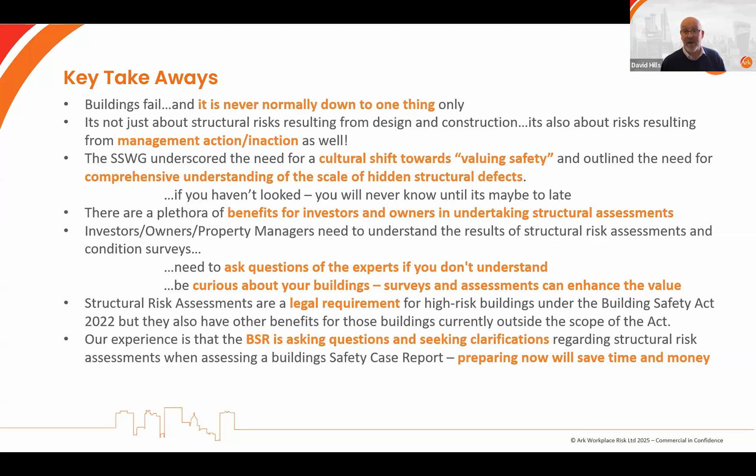In our experience, what we're seeing is that the BSR is asking questions. They are seeking clarifications. In almost every organisation that hasn't had a structural risk assessment, we are seeing a request from the regulator within 7 days to provide that risk assessment. And if you haven't got it, you're not going to be able to deliver that within 7 days. And lastly, you've got a legal duty to manage the outcomes.